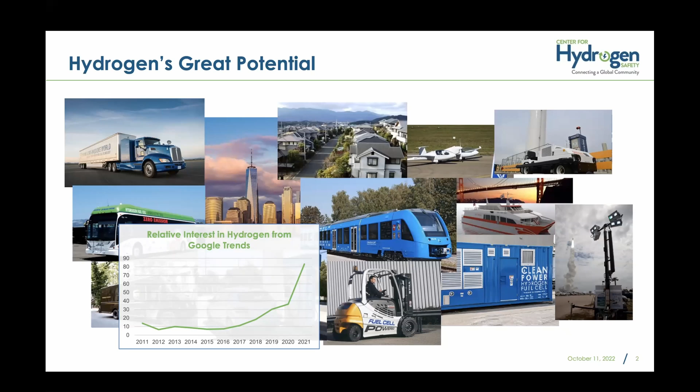Well, we know hydrogen's got great potential. It's certainly used in many different applications, some of which you could see here. Trending for Google relative to the term hydrogen, you could see over the last 4 or 5 years has really grown significantly.

We probably could all recognize the need for safety with hydrogen, but just to give some background, safety issues could be a deal breaker if they're not successfully addressed. We start out with hydrogen with a really strong foundation. It comes with nearly a century of industrial use, lots of good safety knowledge, best practices that exist. However, its use as a fuel and an energy carrier is certainly new to many who may not have the experience or expertise for its safe use.

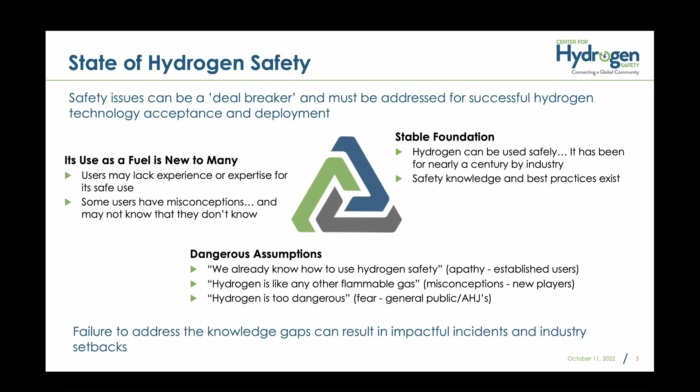Lots of misconceptions, and people may not know what they don't know. So we see these assumptions coming up, things like we already know how to use it safely, or it's just like any other flammable gas, or it's too dangerous. Failure to address these gaps can result in incidents and industry setbacks.

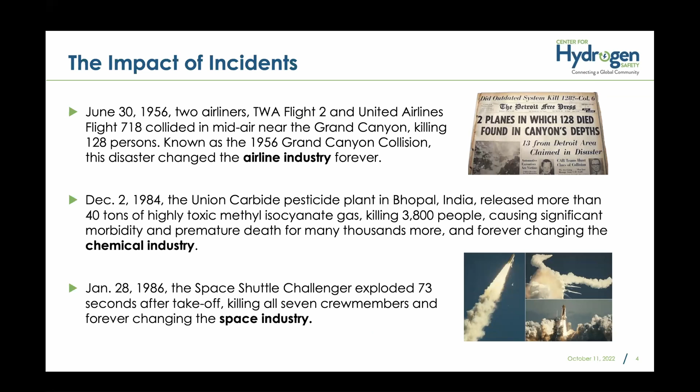Considering incidents, some other industries that have had significant setbacks as a result of those incidents were the airline industry, the chemical industry, and the space industry. The Bhopal, India incident with 3,800 people being killed, and certainly the space shuttle incident, were incidents that have set back the chemical and space industry quite a bit. And so we don't want to see the same thing happen.

Hydrogen, this is the last few years, some incidents that have occurred. And there's really a common thread here, things like not understanding the electrolyzer membrane gas permeability and its operation, an assembly error on an end plug, an incorrect pressure relief device installed, unauthorized repair and failure to follow procedures, and an incompatible pressure relief device.

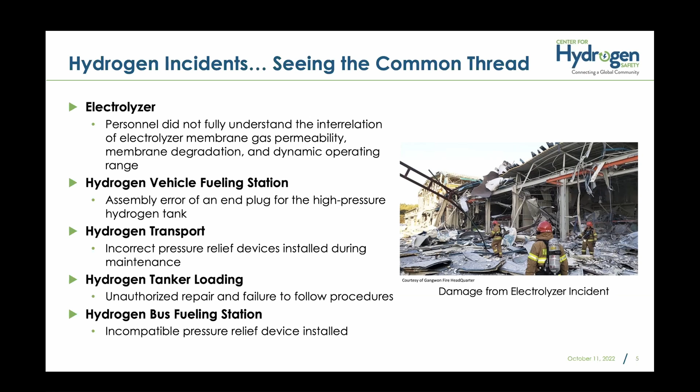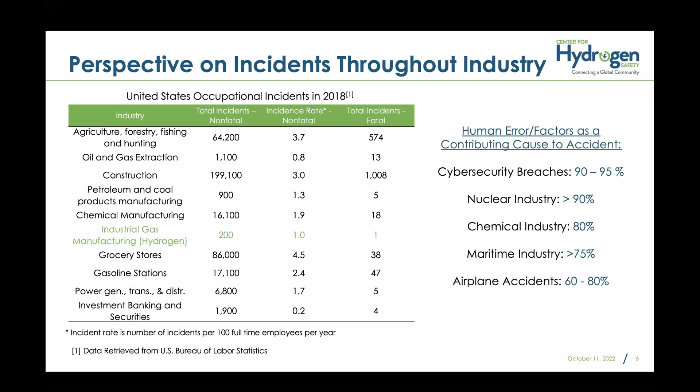So you ought to see that the common thread here in these incidents is human error. And that's not just true for hydrogen, but it's also true for other industries as well. So there's not a unique thing here with the hydrogen industry, but some of the others include 90 to 95% in cybersecurity, nuclear industries. And you can see some of the other numbers there on the right as well.

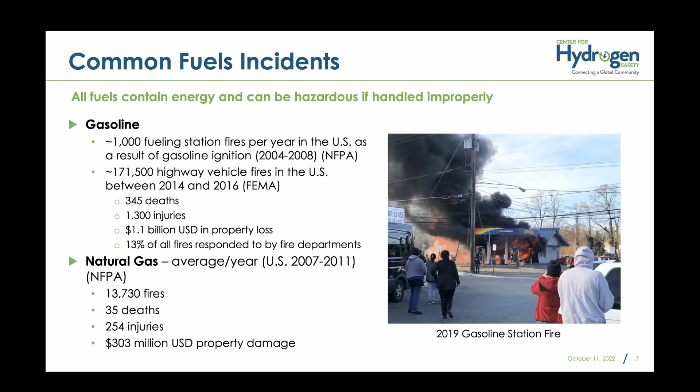All fuels contain energy and can be hazardous if handled improperly. Here you see some information on gasoline and natural gas that we're probably all very familiar with. The number of injuries and deaths, this is just a small section looked at over a number of years and locations, and yet the losses were pretty high. But we've grown comfortable, if not complacent, with these fuels.

So let me jump into hydrogen, its properties and behavior. It's a gas at ambient conditions. It rises and disperses rapidly. Flammable range is 4 to 75% in air.

It's a liquid at minus 253 C. It's a cryogen. You can't get to that by compressing, it's only by chilling. You see that when it expands, it's about 850 times when transitioning from liquid to gas phase. Energy content, a kilogram of hydrogen is approximately equal to a gallon of gasoline. You can see the numbers there.

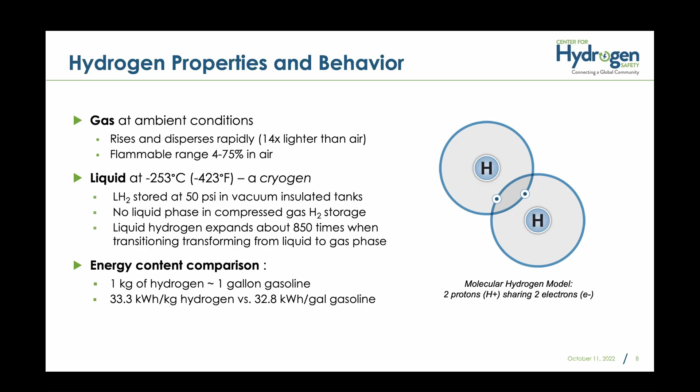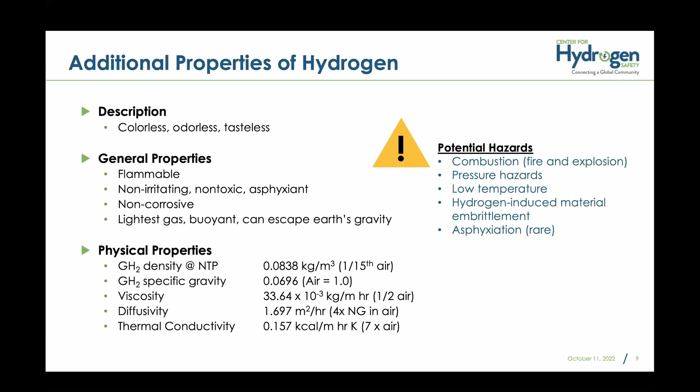Some additional properties: it's colorless, odorless, tasteless, certainly recognized as flammable, non-corrosive, can be an asphyxiant, but all gases can in the right concentrations. It is a combustion hazard, and its use as a fuel results in pressure hazards as well. Cryogen can be a low temperature hazard. Embrittlement is also certainly a factor with hydrogen, and we'll talk a little bit more about that as we go here.

Hydrogen is naturally odorless. Lots of work being done to try and come up with an odorant. There are some challenges: it's the smallest molecule, and it's also very buoyant, so it wants to move up and away from other molecules. The other problem is that if we use something to odorize it, we need to make sure those odorants are not going to cause problems in equipment such as fuel cells.

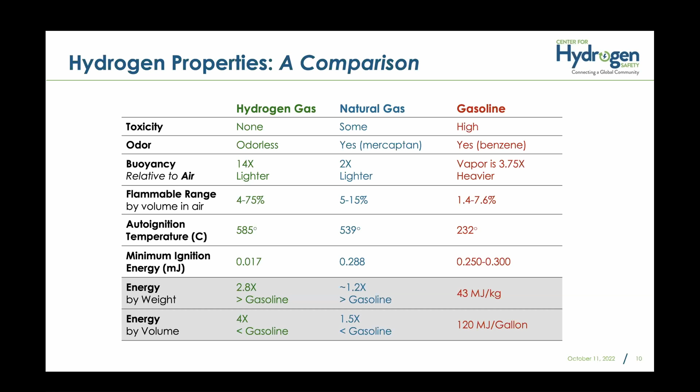Another line here I'd like you to highlight is that minimum ignition energy. You can see the energy needed to ignite gasoline and natural gas is about an order of magnitude or so higher than hydrogen. So it's very easy to ignite hydrogen. A high pressure leak can also auto ignite.

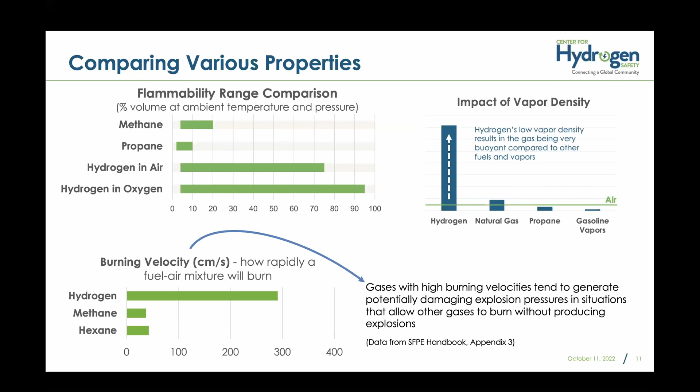Burning velocity - gases with high burning velocities can really generate potentially damaging explosion pressures. What I'm trying to point out in this bar graph is that it's just so much greater for hydrogen than some of the other gases. This is one of those properties that makes hydrogen unique, and we need to be careful with how we use it and how we protect.

Some other characteristics: because it's a small molecule, small leaks are somewhat common, and most are insignificant. So when you're getting very, very low weeping around a joint, perhaps, it still needs to be addressed and fixed, but most of the time it doesn't create a hazardous scenario.

High pressure leaks can lead to explosions under jet flames, and there's a fairly new phenomenon that's really starting to be addressed, which is this jet flame explosion or jet release explosion, where they are seeing even without obstructions or other conditions, jet flames can result in explosions fairly quickly.

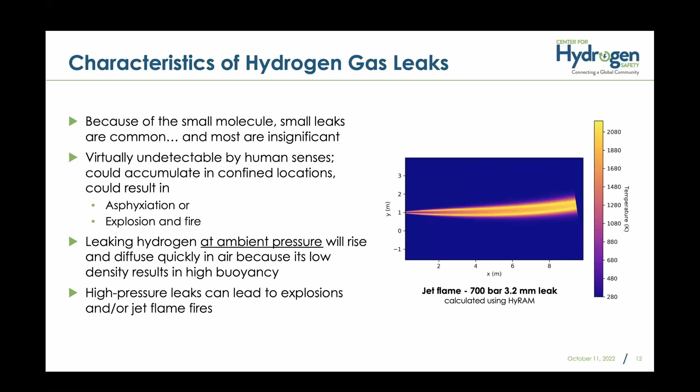So safety - there's certainly a lot more than 3 parts, but I want to focus in on 3 parts for this discussion: codes and standards and regulations, best safety practices, and then a culture of safety, which is being invested in safety. I want to really keep that in focus as we go through.

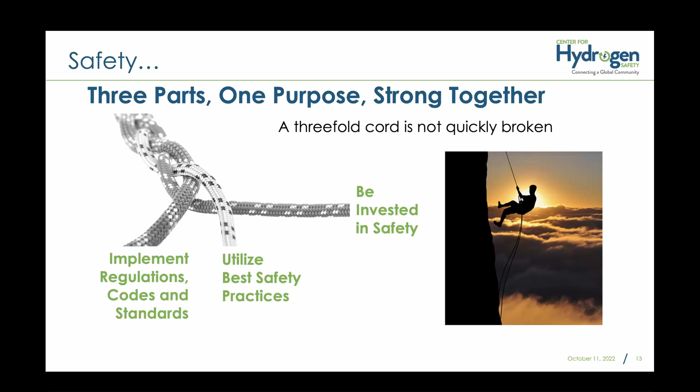We're going to look a lot at the middle piece there, but certainly codes and standards play a significant role in ensuring that the public is protected, and that there's confidence and consistency to how requirements are applied. Safety culture is also very important, as without that culture of safety, we're going to end up in incidents and a failure to really take the necessary precautions to make sure we're working properly around hydrogen.

Safety planning should be a part of anything we do, and I want to emphasize this in the beginning. So whatever the hydrogen project or activity you might be involved in, safety planning is an important part of the process. It's essential to protect people, minimize damage to facilities, protect an organization's reputation, and help the industry progress without major setbacks.

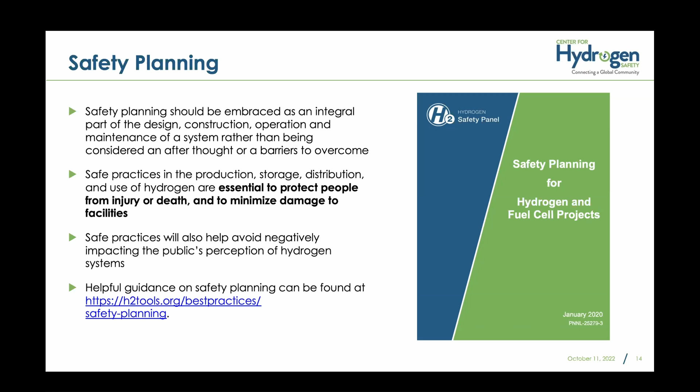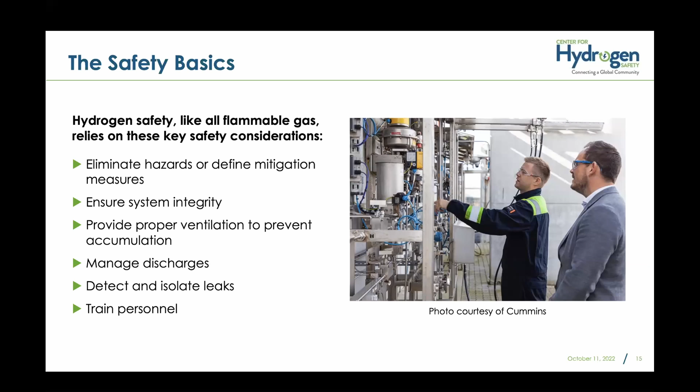So let's jump into the safety basics. Hydrogen is a flammable gas, and like all flammable gases, there are some basic considerations, like defining mitigation measures, eliminating hazards, system integrity, proper ventilation to prevent accumulation, managing intentional discharges (not accidental), detecting and isolating leaks, and training personnel.

I'm going to jump into just a few items. There certainly are a lot of considerations for how to address and handle hydrogen safely, but I'm just going to cover a few that tend to come up quite a bit in our discussions.

Ventilation is very important. If you have an enclosure, there are some times when you can do passive ventilation, but active ventilation is really the best approach. Some things to think about with active ventilation: the ventilation system itself can't provide a source of ignition.

So you need things like non-sparking fan blades and electrical equipment classified for that environment. You want to make sure the ventilation system is operating at all times when hydrogen is present or could be accidentally released. If you need to shut down the ventilation system for maintenance or other activities, you should isolate the hydrogen as well.

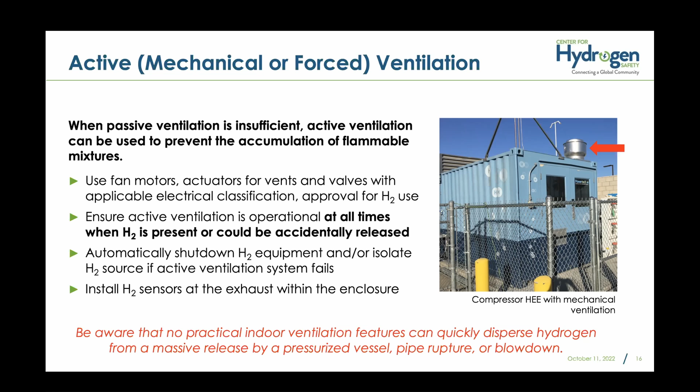Leak detection is a big part of what we discuss. It may be required by a regulatory agency, or provided just to enhance the safety of the operation.

Another approach is to monitor internal pressures and flow rates for piping systems. If you have a system where the flow rates are a certain number and the pressure is at a certain number, you can monitor and see what is off-normal and then detect a leak. This doesn't work very well where flow rates or pressures are variable, for instance, in a laboratory setting where different users are using it at different times.

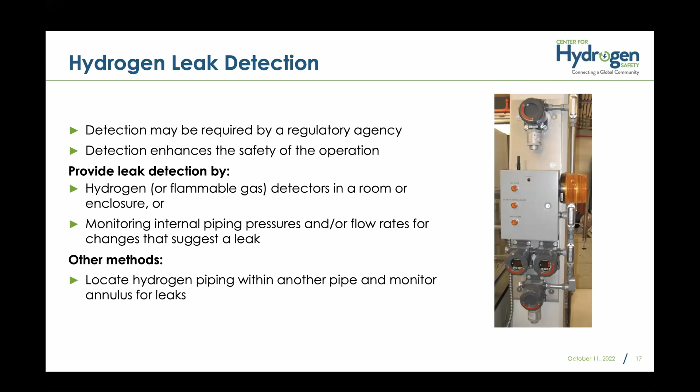Another method is to put a pipe within a pipe and monitor that annulus for hydrogen.

Checking for leaks manually, extreme caution should be utilized. Hydrogen in its pure form has a nearly invisible flame. In many cases where there are accidental fires, the flame will be visible when it entrains other materials that might be burning as well, or dust or dirt, those sort of things.

But the best approach is to have a flame detector or thermal imaging camera. Listen for venting gas, watch for thermal waves. A combustible probe, such as a broom, could be used.

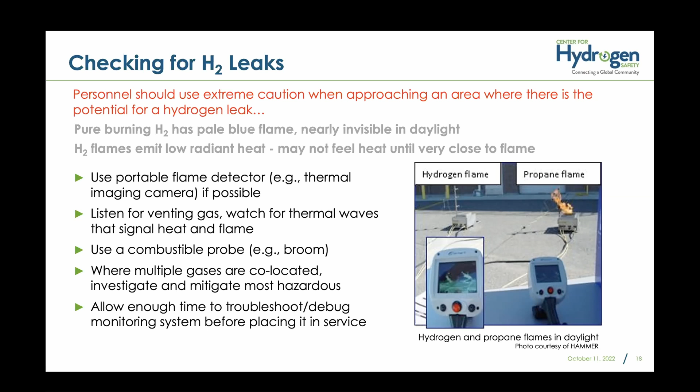A couple considerations where you have multiple gases: be sure to investigate the most significant hazard first, and then work your way back, and allow enough time to really determine what caused the leak prior to going back into that area.

Emergency shutdown system is another big part of what's needed for hydrogen. It should operate on manual detection or fire alarm, loss of ventilation, those sort of things. De-energize unclassified electrical - most times it should keep the ventilation running. And then automatic shutoff valves for the supply of hydrogen should be isolated, that sort of thing.

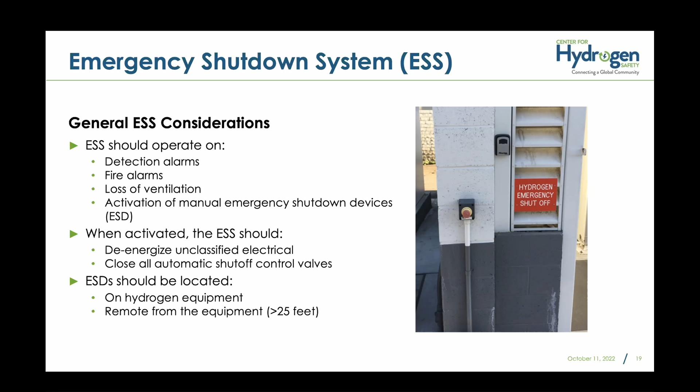Where you place those switches is often very important to consider. In this case, in the picture on the right, you're seeing the red button there is the emergency off switch. The challenge here is that the dispenser for the vehicle is on the left of that, so a car door could hit that switch and accidentally trip the system.

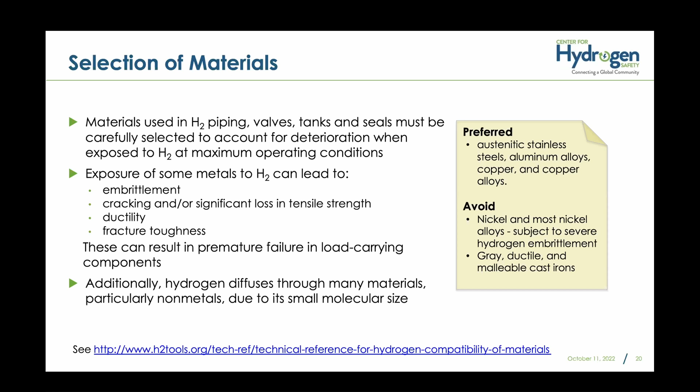Selection of materials—I mentioned that embrittlement is an area of concern for hydrogen, so it's really important to consider the type of materials. Austenitic stainless steels are about the best, along with aluminum alloys, copper and copper alloys. At the end of the day, it's really important to know what your use condition is and to have the materials for that use condition.

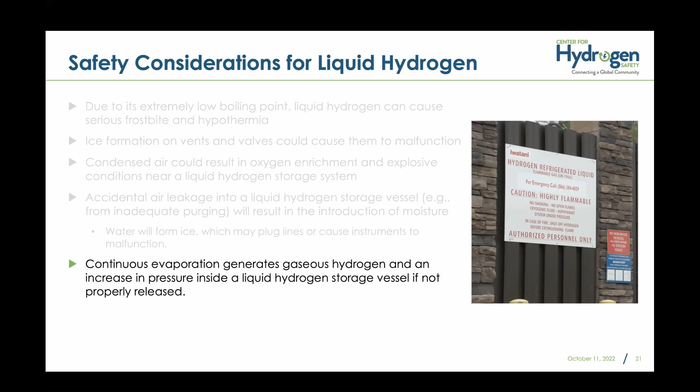For liquid hydrogen, it can cause serious frostbite and hypothermia. Ice can form on vents and cause them to malfunction. Certainly, condensed air can result in oxygen enrichment and explosive conditions. Ice may form and plug lines, and evaporation generates a cloud that could flow downstream with ignitable concentrations of hydrogen. So lots of things to think about with safety—this was just a few.

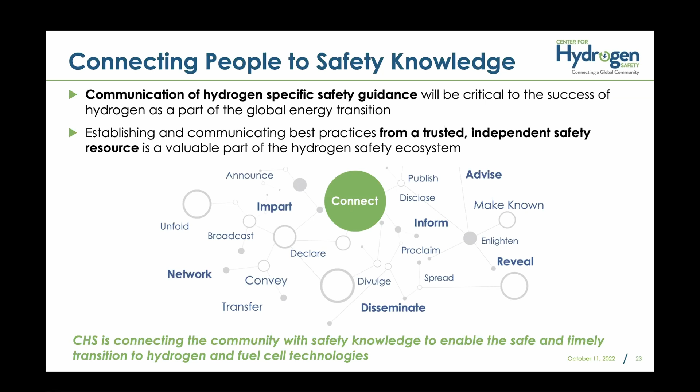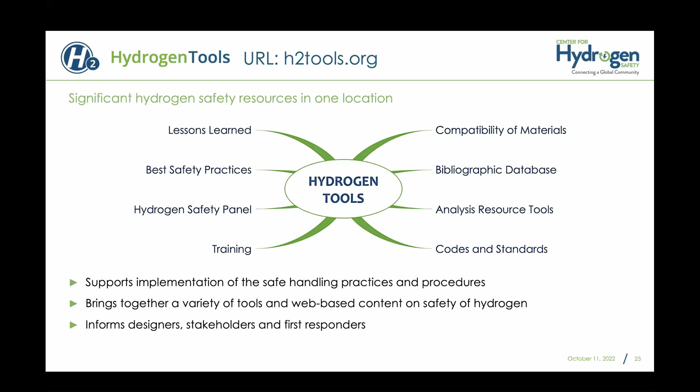I wanted to point out a few resources for you to think about going forward. It all comes down to communication. I've been involved in this for a long time, and while there are technical issues, getting safety information to the right people to do their jobs is a significant issue in what we're doing. So I want to point out the Hydrogen Tools portal, as well as the Center for Hydrogen Safety that I'm a part of—some resources available to you. The Hydrogen Tools portal has lots of resources in one place: lessons learned, best practices, training materials, analysis tools, and codes and standards.

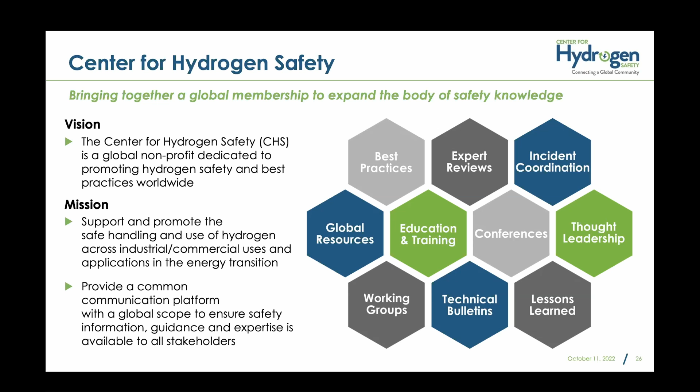The Center is really trying to bring this material and best practices worldwide. You can see some of the resources at the right. It's for all use of hydrogen, and it's really meant to develop a community around hydrogen and doing it safely.

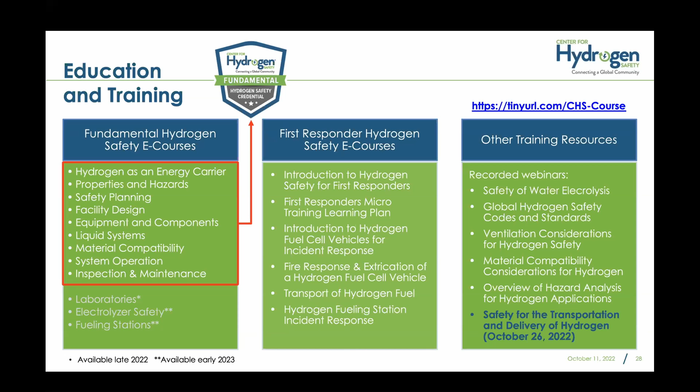I also wanted to point out some educational materials, available through the URL listed at the right. There are three types here: traditional e-learning on the left with a credential that goes with it, some first responder courses, and we routinely do webinars that we make available to our membership. It's free the day of, and then pay for the product later on.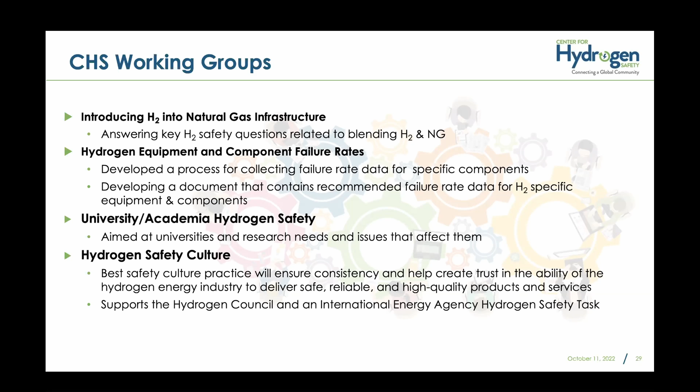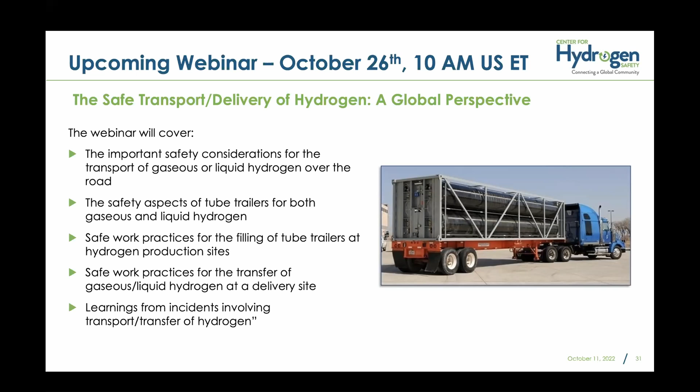Invite you to follow us on LinkedIn to hear more about safety and safety issues and what we're doing, as well as some tools and resources that may be beneficial to you. Also invite you to our upcoming webinar—this is again a free webinar, on transportation safety with hydrogen and a global perspective on that. We're certainly going to be back in Europe in May for a conference. We just had a conference in the US last month, very well attended, with lots of great discussion.

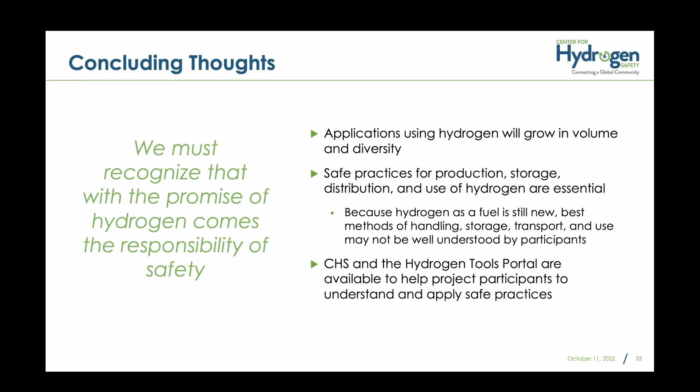So I'll finish up by saying that with the promise of hydrogen comes the responsibility of safety. The applications are going to grow, safe practices are needed and need to be disseminated, and certainly there are some good tools out there to help you with all that. So thanks for the time to share—look forward to your questions and hearing what your thoughts are as well.

Thank you very much, Nick, for setting the stage. Obviously, safety is paramount for public acceptance and implementation of the hydrogen economy. So that basically lays the groundwork for our next topic, which is hydrogen transportation. Professor Mani Sarathy is in chemical engineering, and he's also associate director of the Clean Combustion Research Center at KAUST. He is currently also senior manager of technology and innovation at Enowa Hydrogen and Green Fuels. So welcome, Professor Mani, and I'd like to go ahead and proceed with your presentation. Thank you.

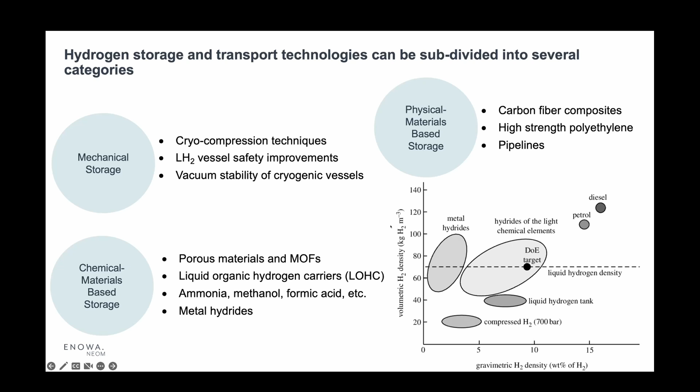So hydrogen storage, of course, has been around a long time. Hydrogen is stored in refinery settings, in vessels. It's transported typically in steel cylinders for shorter distances. For long distance transport of hydrogen, it's a relatively new area of interest because the idea is to move hydrogen from areas where it's produced, such as Middle East and North Africa, to regions of the world where it's needed for demand, such as Japan, Korea, and Europe.

And these are some articles we've seen recently in the past few years. Kawasaki, together with the Australians, are piloting liquid hydrogen tankers, one liquid hydrogen tanker moving hydrogen from Australia to Japan. Saudi is exploring the option of green hydrogen via a pipeline to Europe. And other companies are looking at new types of technologies for ships, such as Hyundai Heavy Industries. This is just to name a few, and we'll talk a bit more about these different technologies and when they make sense and when they don't make sense.

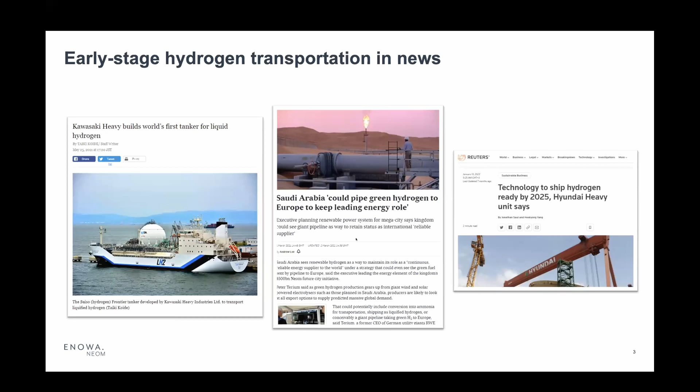So the first, hydrogen compression and liquefaction. As we mentioned in the last talk, it boils at -253 C, so below that, you can typically compress the hydrogen and liquefy it. This is a schematic of the system from Kawasaki. You basically have a cold box, and inside of that cold box, you have a complex network of heat exchangers and an expansion turbine to get you down to the temperature that's required.

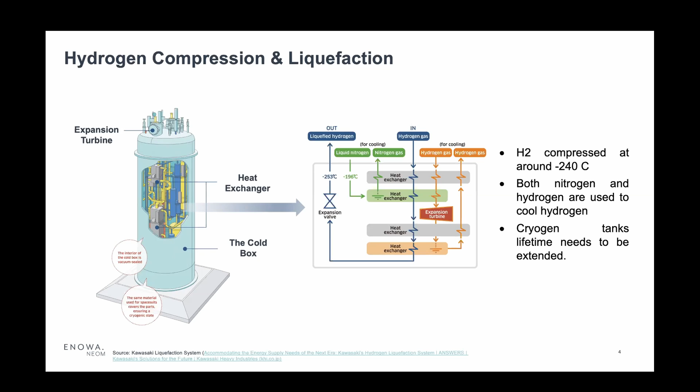Interestingly, they use liquid nitrogen for the cooling, and then also they use hydrogen for the cooling. Hydrogen gases pass through an expansion turbine which gives additional cooling to cool down to that minus 253 C. And then the tank has to hopefully have good insulation to maintain the cold temperature. Of course, the cryogen doesn't last forever, so the lifetime is limited, and a lot of the design, fabrication, and engineering of the system is to extend the lifetime of the cryogen inside of the tank.

For large-scale hydrogen storage, it's most likely to be underground. So let's imagine we're making tens of thousands of tons of hydrogen per day. In that case, it's unlikely that we're going to store it in above ground vessels. So today, the main methods for storing hydrogen in very large volumes are subsurface structures. These can be rock caverns, salt caverns, or even underground pipes - basically drill a hole down, install a steel casing, and put a valve on the top, and you can compress your gas inside of this chamber, and the earth basically acts as your pressure containment system.

On the bottom right chart, this is a nice graph from a company out of Australia called Ardent Underground Hydrogen Storage. Their basic concept is, again, drilling down large bores into the earth, lining it with cement, capping it off, and using that as a hydrogen storage vessel. And the graph is nice because it shows us the approximate cost.

This is Australian dollars, cost of hydrogen stored per kilogram, together with the amount of hydrogen being stored. Technologies like tube trailers and pressure vessels are very expensive in terms of cost per kilogram of hydrogen, and they're only useful for, say, maximum 1 ton up to about 10 tons. After that, you've got to go underground or to a very large cylinder bundle.

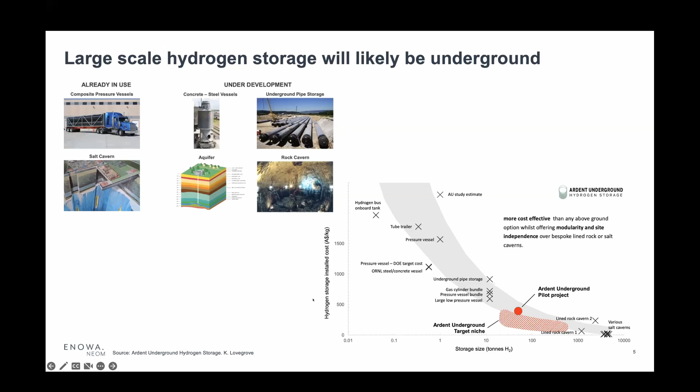At smaller scales, the technology is quite mature already. Essentially what we have is lightweight compressed cylinder storage. This is today the most effective, cost-effective, and lightest way of transporting hydrogen over short distances. This is what we use in NEOM now for hydrogen storage at small scale, in the range of hundreds of kilograms to several tons.

Essentially it's a carbon fiber composite vessel with a polymer liner. The reinforced shell allows for corrosion resistance, it's lightweight, and it can contain the pressure. These vessels are type 4. They can go up to 700 bar, and they're much lower in weight than a typical steel vessel of comparable rating.

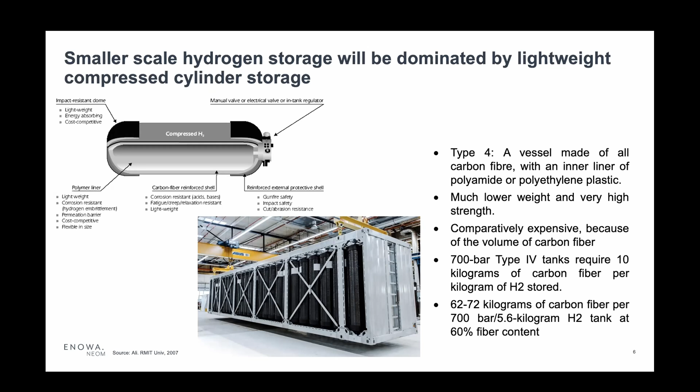There's a lot of discussion now about the global carbon fiber market. If we look at expansion of hydrogen production and utilization, the demand for these hydrogen storage cylinders will lead to a huge increase in the amount of carbon fiber needed, and the carbon fiber industry has to scale up significantly to meet that demand.

Your simplest example is a molecule like toluene. Toluene is an aromatic, and if you add hydrogen to it, you get methyl cyclohexane. So you hydrogenate it—the hydrogenation process is exothermic, it releases heat. You can then move that methyl cyclohexane just like an oil or a liquid.

That hydrogen, removed from the LOHC, can be used for mobility applications, fuel cells, and industrial processes—you can get a rather pure form of hydrogen. The advantage of this kind of system is that the amount of energy you store in these LOHCs is quite large, much larger than you'd carry in a battery or thermal energy storage system, and could be nearing the energy density of liquids like gasoline and diesel.

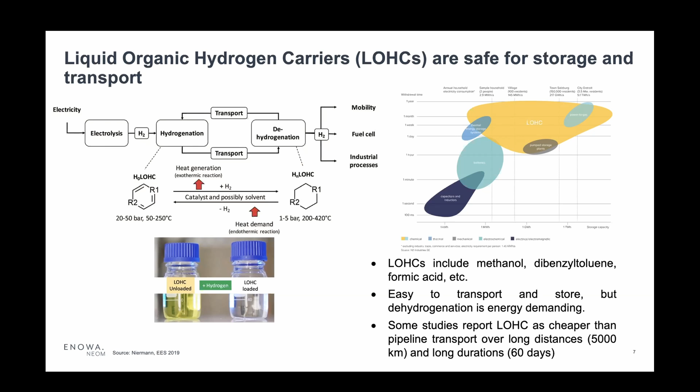Whereas LOHCs have the advantage that you can use existing vessels, you don't worry about leakage, but you do have the challenge then of recovering the hydrogen and needing heat for that process.

So if we look at today, when companies like NEOM look at exporting hydrogen, of course there's ammonia. Ammonia, I'm not going to talk much about because we've heard about it in previous seminars. The alternatives are liquid hydrogen and LOHC.

So liquid hydrogen, again, cryogenic, significant infrastructure requirements are needed. You need spherical vacuum isolated tanks. It's not as simple as just taking existing liquefied natural gas infrastructure and changing it to hydrogen. Entirely new infrastructure and specific infrastructure is needed because of the different temperature requirements.

So we need to build essentially hydrogen liquefaction terminals at places of export, and at places of import. We need, of course, the degassing facilities to import. So you need a corresponding liquefied hydrogen terminal to bring in the material. And then also we'll need very special vessels with specialized vacuum tanks. One advantage potentially is that these vessels, the boil off of the hydrogen during transport could be partially used for powering the vessel.

LOHCs, on the other hand, such as methyl cyclohexane, dibenzyltoluene, are very easy to transport. You can use existing floating roof tanks. Infrastructure requirements would be very minimal. The major challenge is you have to build your dehydrogenation infrastructure. At the point of use, you will need access to waste heat, or you'll need a very efficient way of either burning hydrogen to generate heat for the dehydrogenation, or getting energy input from other places.

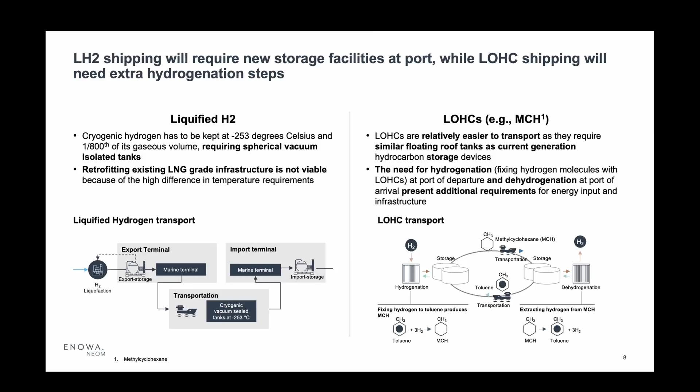So I'd like to talk more specifically now in NEOM context. What are some of the things we try to think about if we want to export hydrogen in things other than ammonia? Again, we have options of a pipeline. We could look at those derivative molecules like LOHCs and LH2. And then we can also look at potential destinations where this material has to be transported to.

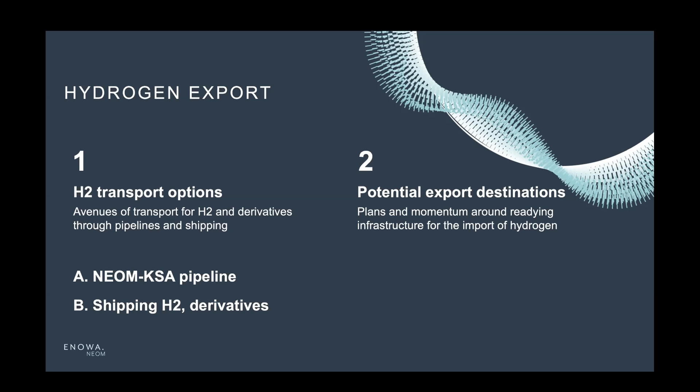So again, the state of the art today, if we were to make a decision for the first plant for large-scale hydrogen production and export, is ammonia. You combine hydrogen with nitrogen, you liquefy it around 6 bar, you transport it by ships, and you need to develop an infrastructure for recovering the hydrogen back from the ammonia by cracking. We heard about that process a few lectures ago about ammonia cracking to get hydrogen.

The tankers are pretty well established for transporting this material. Now, LH2, again, we said it's much lower temperatures. You need to pressurize and liquefy it. The ships do not exist today, but there's no issue for reconversion.

The LOHCs, we can make them today. The ships are available. The transport is pretty straightforward. We just need to identify the energy sources for recovering the hydrogen at the point of use. And then pipelines are simple in terms of process. All we need is a pipeline infrastructure, but pipeline infrastructure for hydrogen, either onshore or offshore, are not very extensive these days. We'll see in the next slide potential challenges around building this infrastructure.

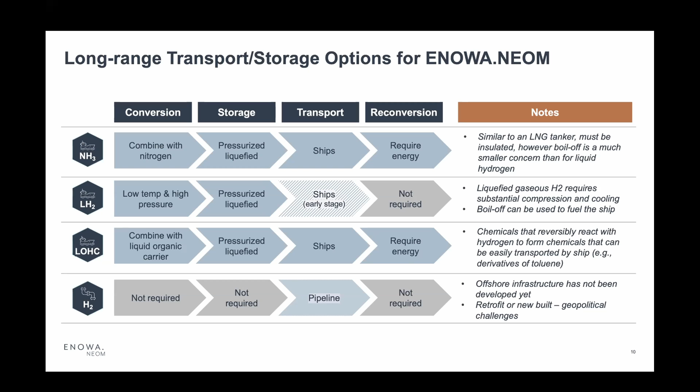So let's take a simple example. Momentum is building in Europe and Japan, mainly to import hydrogen by ships. We see the port of Antwerp, also port of Rotterdam, looking at import facilities. There's a study underway in the EU on the feasibility of large-scale commercial import of hydrogen, both by LOHC and by liquid hydrogen. There are pilot projects in Japan and Australia, which we mentioned previously about LH2.

So I think for the next 10 years, the shipping routes for hydrogen will expand, liquefied hydrogen as well, LOHC and ammonia. There'll be a lot more R&D needed to make these supply chains more effective and cost-effective and safe, and a lot of need for improving the storage technology to reduce the losses during the transportation.

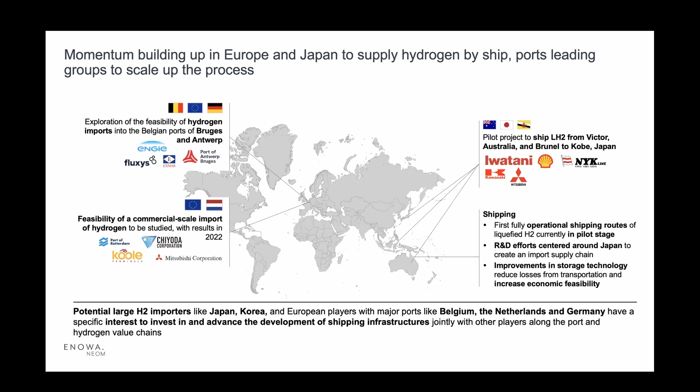Beyond 10 years, if the hydrogen economy takes off and there's sufficient leadership from the countries that are producing hydrogen as well as the ones that are taking the largest demand, pipelines could become realizable infrastructure development projects.

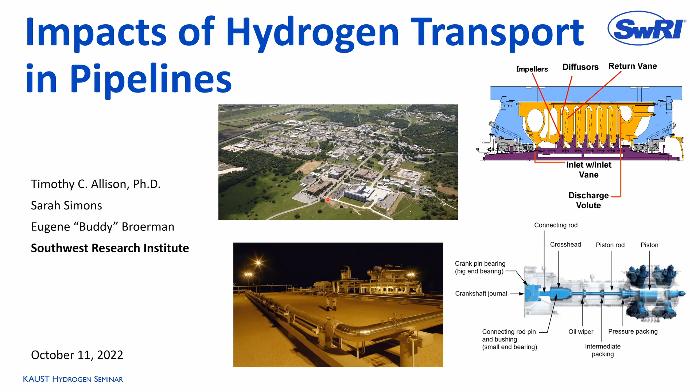Okay, so let me just introduce from my perspective why hydrogen blending or hydrogen pipelines are of interest. Fundamentally, it comes down to the value case for hydrogen is really in energy storage and transport. We have very low cost renewables that we're trying to use to decarbonize. They're not available all the time, and their peak availability doesn't coincide with peak usage in many cases during one day or even throughout a whole year. We've got to find a way to store very large amounts of energy for very long periods of time - months, seasonally. There really are not many technologies out there that can store for that long and can run very large scale systems like a gigawatt scale power plant.

Most of the energy storage schemes that do that are either hydrogen or hydrogen carriers, as was described by Mani. So I think that's the real value here - hydrogen is something that can be made and then stored and transported around. Pipelines are attractive, especially in the US, for example, where we have long distances between cities, especially maybe our solar farms are located far away. And we're used to being able to move energy around quite easily and cost effectively.

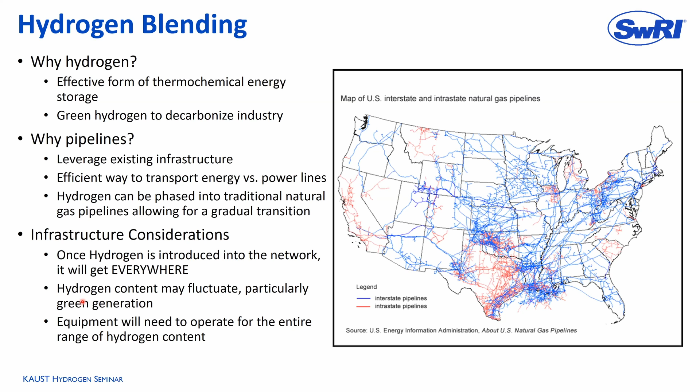I'll explain why here in a moment. So if we're going to be introducing hydrogen non-uniformly, there are many impacts to the equipment.

I just want a quick note that there is actual experience with hydrogen pipelines, not just in the US, although that's what I'm focusing on here. There are also hydrogen pipelines in Europe. They primarily serve the petrochemical industry, so it's hydrogen as a product. But there is a pipeline shown here along the U.S. Gulf Coast, and even very large-scale hydrogen storage associated with that pipeline. So I've shown an aerial view of a salt dome cavern where large volumes of hydrogen are stored to buffer between use on the pipeline and production.

So the pipeline operates at pressures ranging between 250 and 1400 psi. It's relatively small compared to a natural gas pipeline, at least the larger pipelines, so 8 to 14 inches. Larger natural gas pipelines are going over 40 inches in diameter, so moving a lot more energy. At the relatively small scale that these pipelines operate at, they're typically driven by reciprocating compressors, so there is a lot of experience there.

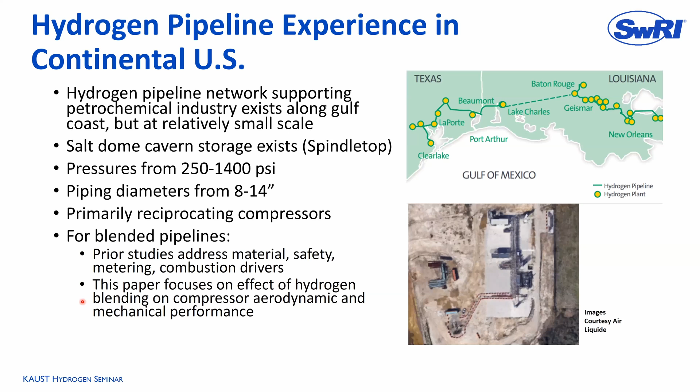Okay, I don't like to go over too many equations, but I'll throw a couple at you. In terms of compression, these are the fundamental thermodynamic equations that apply. I'll start with, on the right, some of the properties of hydrogen. So I'm plotting the specific heat in red dashes, the specific heat ratio in orange dashes, and then the density in a blue line, as a function of hydrogen blended into natural gas from 0% hydrogen to 100% hydrogen.

So as we add hydrogen to a natural gas mixture, the density actually goes way down. Hydrogen's a small molecule. And the specific heat goes way up, order of magnitude. And the specific heat ratio stays about the same.

So what does that mean in terms of compression? This is the equation, regardless of the type of compressor, of how you get pressure ratio through work. On the left-hand side is pressure ratio. It's a function of the compression efficiency, the specific heats in the denominator, the work or the head rise is shown here, and the specific heat ratio is here.

So when you change from natural gas to hydrogen, the specific heat ratio is about the same. What really changes is the specific heat goes way up. And so what that means is that if you want to get the same pressure ratio as the specific heat increases by an order of magnitude, you've really got to do a lot more work with enthalpy rise to get the same amount of pressure rise.

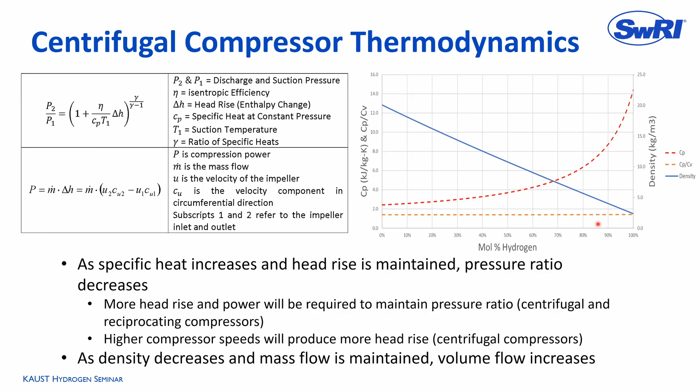Compressors are all volume flow machines. So as you increase the required volume flow in a pipeline, it goes up by a factor of about 3. Then you're going to need larger compressors or compressors in parallel to handle that kind of volume flow.

So we did a study actually analyzing blending in a pipeline case study.

We looked at several different pipelines, and I'm showing just an example chart from a very large pipeline that's transporting gigawatts of energy flow. We looked at how that affects the compression requirements of the system.

One of the first things you have to ask yourself when converting from natural gas to hydrogen is what you're trying to maintain. In a pipeline, you can maintain volume flow, which reduces energy content. You can maintain mass flow. Or, as we did in our study, you can maintain energy flow, assuming energy demand doesn't change. When you do that, you end up with increased compression work.

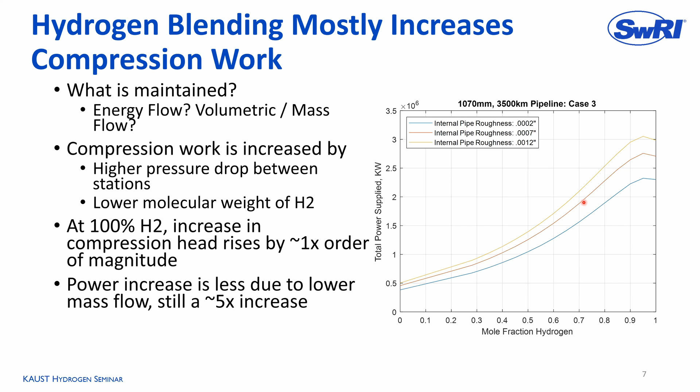It's not just because of the lower mole weight and specific heat. It's also because as you increase velocities in an existing pipe, pressure drop goes up. So you have to work harder to compress it to begin with, and work harder to make up for the higher pressure drop. That resulted in a power increase, as you can see on the right, from 0% hydrogen up to near 100% hydrogen. We see almost a 6-to-1 or 5-to-1 increase in power. That's quite significant, affecting gas turbine or motor drivers regardless of compressor architecture.

An interesting side effect is a trade-off: if you're using gas turbines to drive compressors, which most pipeline stations in the US do, you need more compression power, requiring more fuel consumption, but you're using a lower carbon fuel as you blend in hydrogen. So we looked at CO2 emissions from compressor stations as you blend hydrogen in, and initially the answer is that it goes up. The power requirements outpace the carbon reductions until you get to about 65% hydrogen, where you're at about 2.5 times the CO2 emissions from your pipeline drivers. Then from there, at 100% hydrogen, you go to zero carbon emissions.

I want to note this is only looking at transport CO2 emissions. Of course, you're moving hydrogen for an end use, which makes the picture better, but where do you draw your boxes on emissions regulations? Hydrogen blending will have some impact on the pipeline stations themselves.

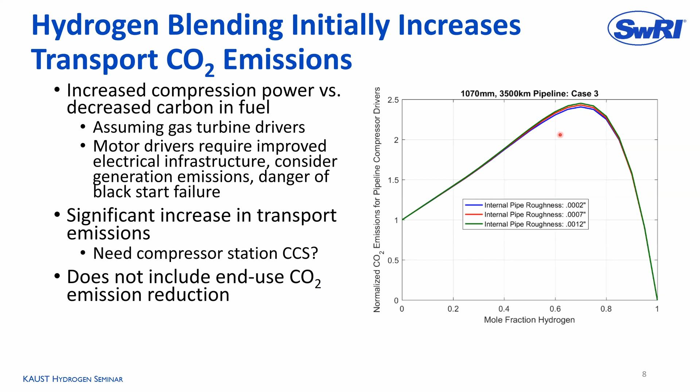Here's a chart comparing centrifugal compressors and reciprocating compressors. We're not changing the compressors at all as we add hydrogen from left to right, simply maintaining them operating at their design point. For a centrifugal compressor, that's fixed speed, fixed suction conditions (pressure and temperature), and the same inlet volume flow, so not changing the machine at all. We're looking at what would change as we add hydrogen to the system.

You see the purple and blue lines: mass flow in blue, and energy content or heating value in purple. Those decrease significantly as you add hydrogen, since volumetric energy density is much lower. It goes down to values of near 10% of what it would be with natural gas, or down to about 30% of the energy content. The pressure ratio would also go down, from the pressure ratio head rise equation. That's the red line here, and we'd not be able to produce as much pressure ratio without changing something about how we're operating the compressor or adding more compressors to the system.

A reciprocating compressor operates a little differently. Its design point is fixed speed, suction conditions, and pressure ratio. This isn't a turbo machine; it operates through volume reduction and meets the pressure ratio imposed by the pipeline. In this case, the energy flow change is comparable, driven by the characteristics of hydrogen relative to natural gas. The volume flow through the machine changes a little bit, related to efficiencies and flow through the check valves that exit the cylinder. The driver power required to run this compressor changes just a little, reducing by about 10%, but not a significant change.

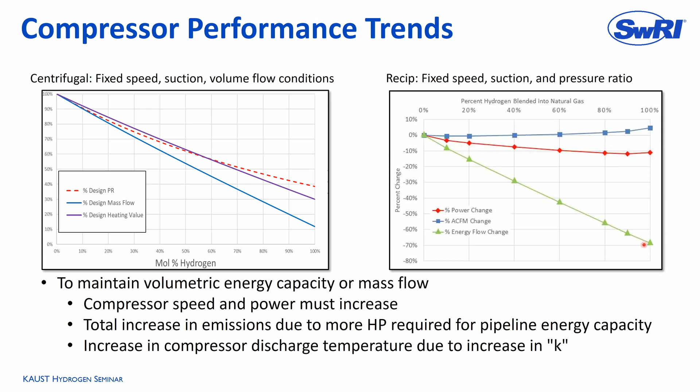Interesting to see. I think the conclusion is, of course, if you want to maintain energy content, we're going to add a lot of compressors. A couple of last comments, then I'll wrap up: pipelines are also flowing acoustic systems.

Some of our work at Southwest Research deals a lot with solving acoustic problems at compressor stations. I mentioned a lot about compression power, but hydrogen is also very different than natural gas in that its speed of sound is much higher. And so as you look at acoustic phenomena in pipelines, that can have a big impact.

Acoustics affect pipeline operation and reliability through things like vortex shedding off of stub tees. You end up with a vortex shedding frequency which is a function of geometry, and if that frequency matches an acoustic frequency associated with the speed of sound, you can run into resonant issues and high vibrations. So as you increase the speed of sound, we have to look at changing those interferences that could affect designs that exist out there.

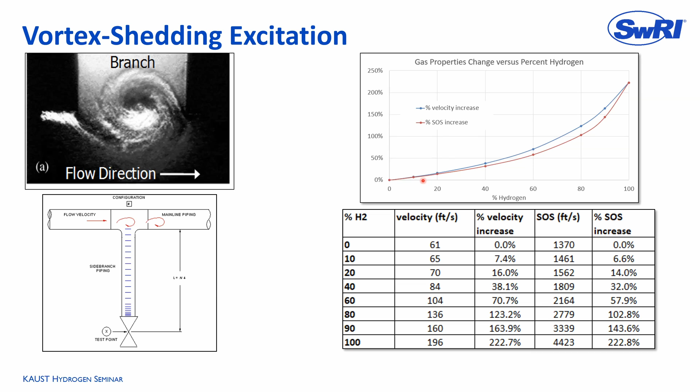The only nice thing about it is if you're maintaining energy content, the velocity increase, which governs the vortex shedding equation, goes up somewhat comparably with the speed of sound. So the ratio between the two may not change a lot.

The other part where acoustics come in is in pulsations for recip compressors. That big piston pushing the gas through introduces pulsations into piping systems, and those can excite acoustic resonances. Recip compressors typically come with pulsation control systems attached to them or designed for them, and that design process really creates a natural frequency associated with the pulsation control system.

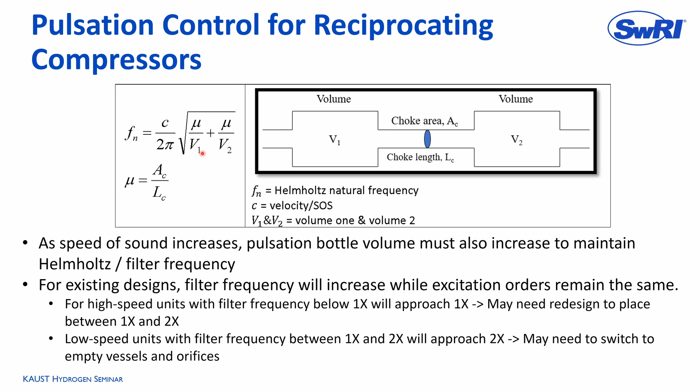It's a function of the speed of sound and different geometries. The design practice is to design for a pulsation filter frequency that's much lower than the operating speeds of the compressor, and that way there's a lot of cutoff of the acoustics at the compressor excitation order.

As you move that speed of sound up for hydrogen, the same design of an existing acoustic filter will move up, and you run into areas where those frequencies may overlap.

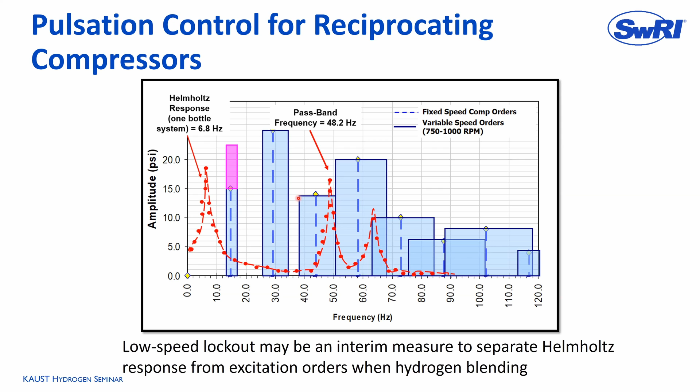A couple of the last things on gas compression systems - there's a lot of coolers, scrubbers, vessels, valves, etc. We expect that there will be other changes needed to a pipeline compressor station to accommodate hydrogen blending. If you're increasing volumetric flows, then coolers will become less effective because they have less time to affect their heat transfer.

Coolers are also sized assuming in some cases that there's a temperature drop across valves through Joule-Thomson cooling. As you blend hydrogen in, the Joule-Thomson coefficient decreases in amplitude, so you get less cooling. Now you're hitting a double whammy on your coolers where you've got higher flow velocities and you've got to achieve more pressure or temperature drop because you didn't get as much out of an upstream valve pressure drop.

Scrubbers are also designed for flow velocities, so as we rapidly change flow velocities, we'll need to add scrubbers or at least evaluate their impacts.

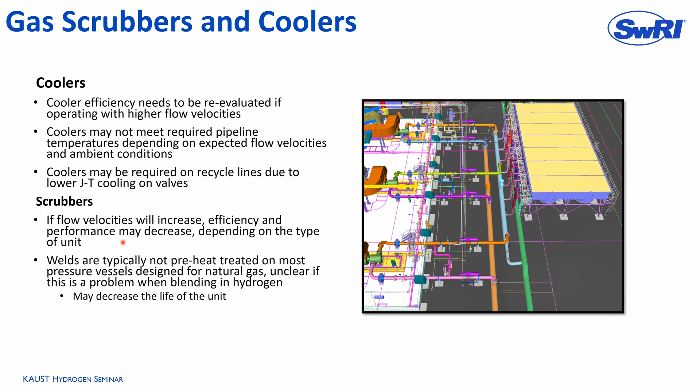That's not really all of the impacts, but it was what I could do in about 15, 20 minutes. Happy to take questions with the rest of the panelists. Thank you.